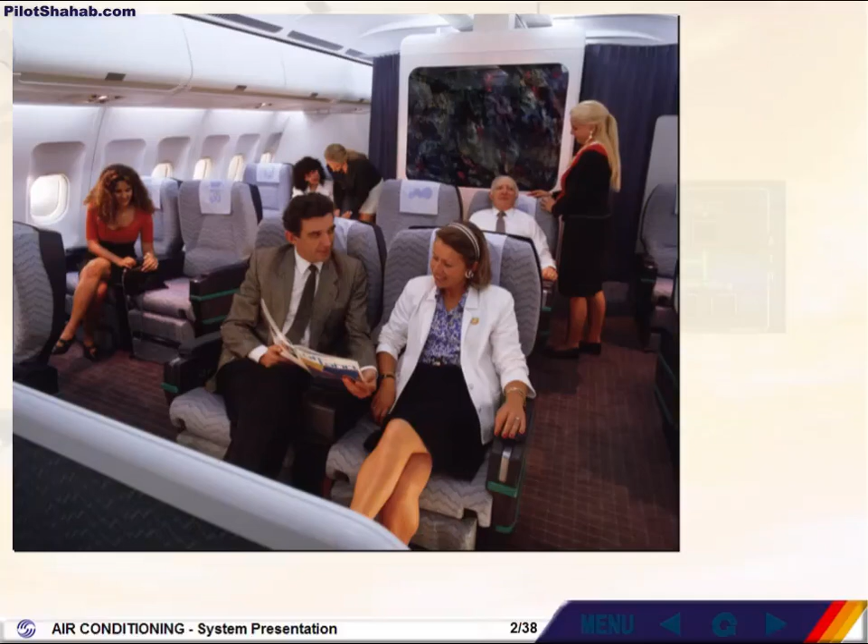Like the majority of the systems on the A340, the air conditioning system is fully automatic and is designed to provide a comfortable atmosphere for working and traveling.

We will begin our study of the system by first looking at the air conditioning packs. The A340 is equipped with two air conditioning packs located in the belly fairing, just forward of the landing gear bay.

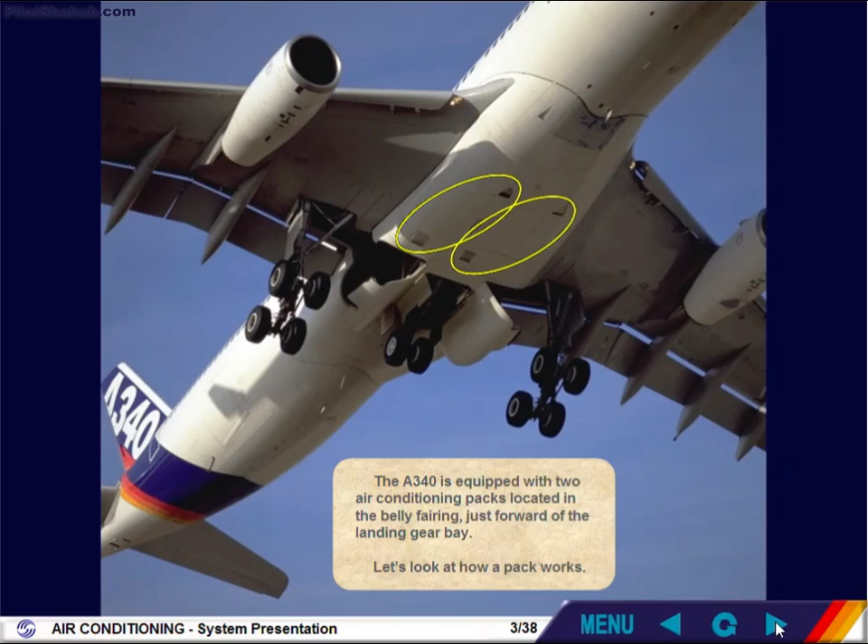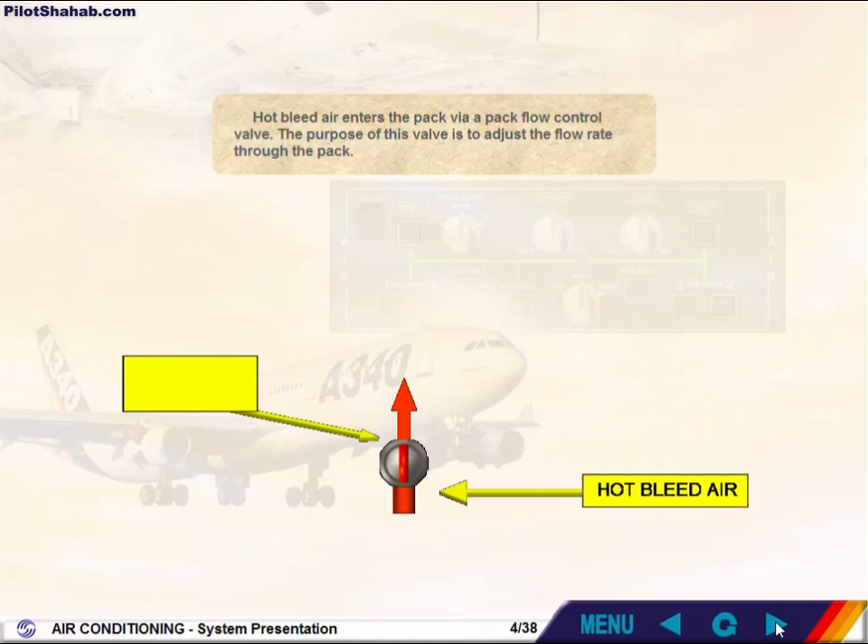Let's look at how a pack works. Hot bleed air enters the pack via a pack flow control valve. The purpose of this valve is to adjust the flow rate through the pack. The air then passes through several stages within the pack, heat exchangers and air cycle machine, so that it is cooled to provide a conditioned air output. In fact, sub-zero temperatures can be achieved.

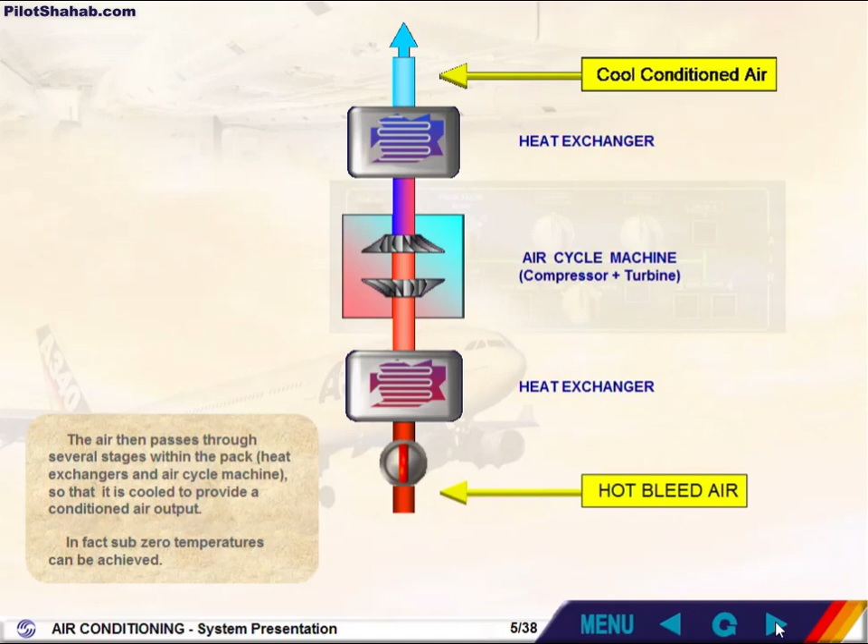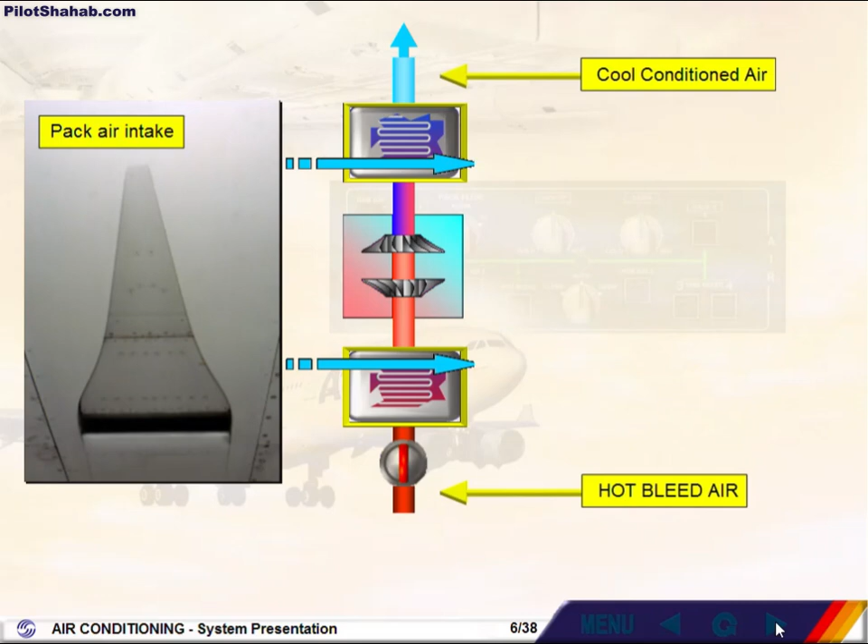The flow of ambient air passes through the heat exchangers to cool the hot bleed air. This flow enters via a pack air inlet flap and exits via a pack air outlet flap.

A temperature control valve is fitted and can modify the pack outlet temperature by adding uncooled air to the turbine outlet flow.

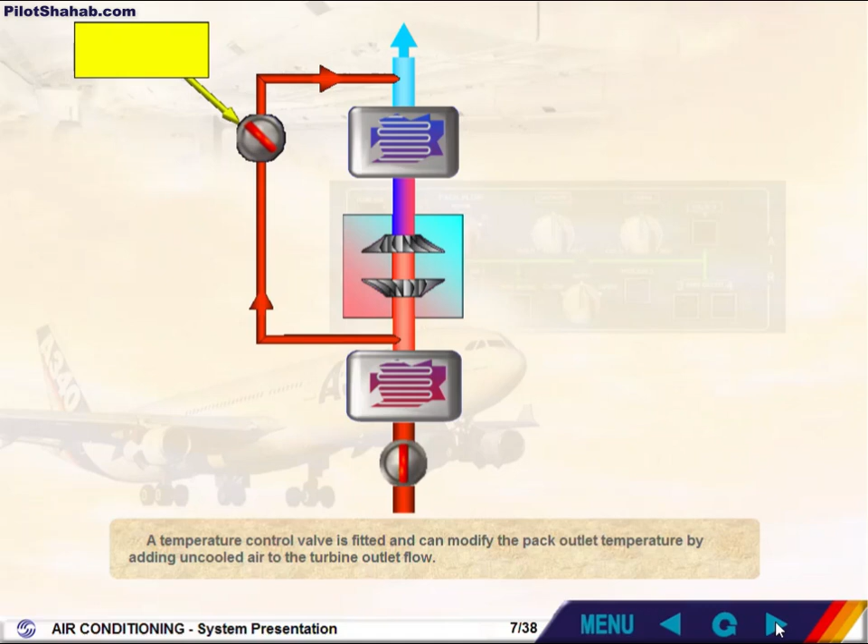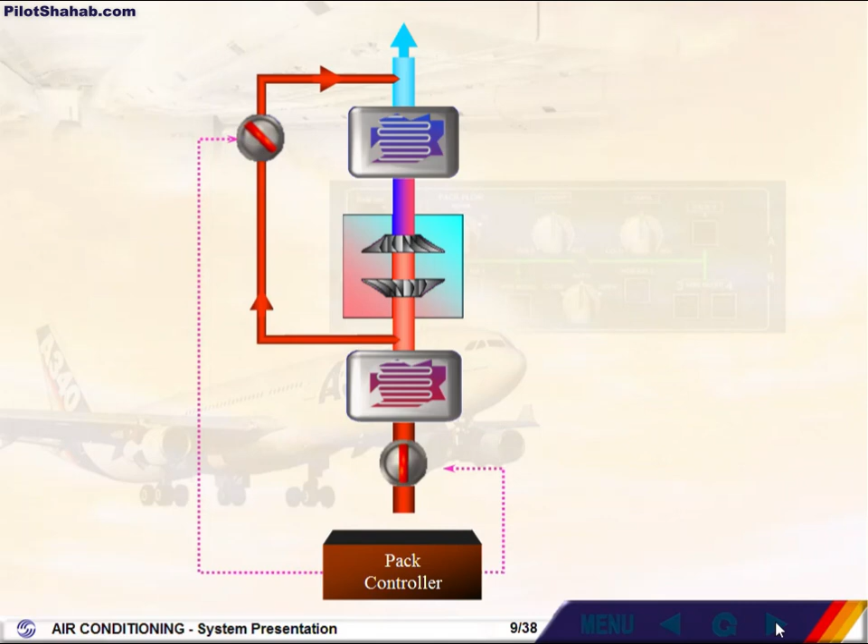The pack flow control valve and the temperature control valve are regulated by a pack controller to vary the flow rate and the temperature output. The pack controller also controls the pack air intake and outlet to vary the amount of air passing through the heat exchangers. Note: to avoid ingestion of foreign objects, the inlet and outlet flaps close temporarily during takeoff and landing.

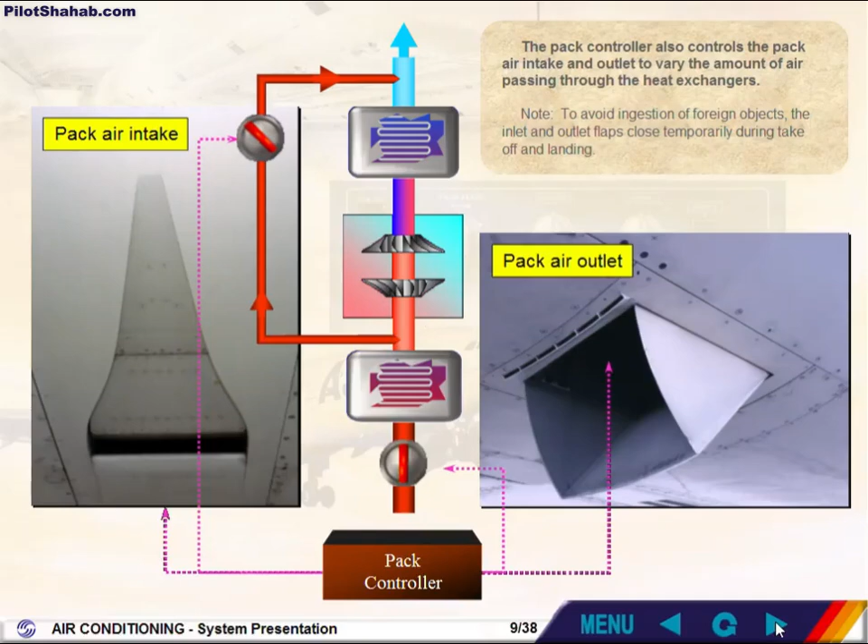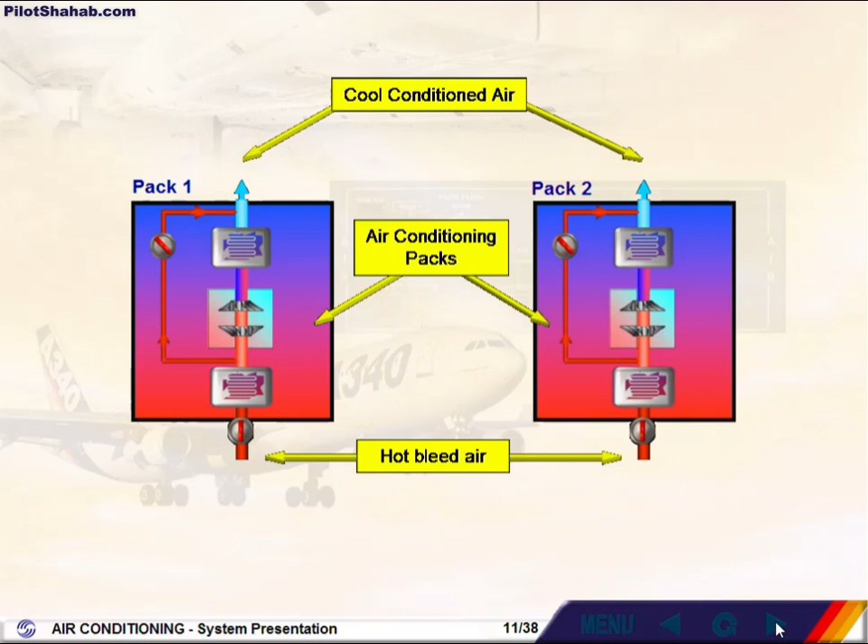To make things simpler, let's define the area within the black box as a pack. The two air conditioning packs operate automatically and independently to provide cool, conditioned air.

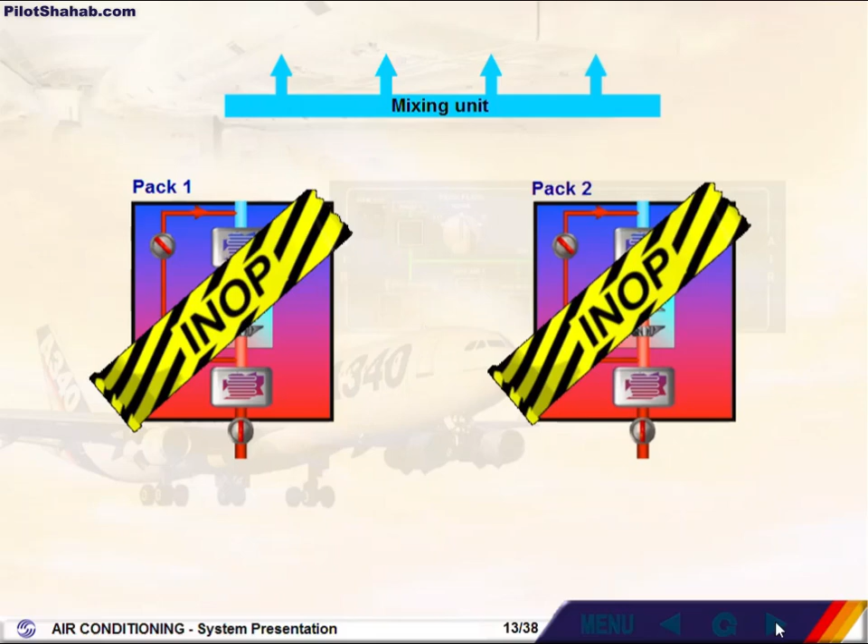The conditioned air from the packs is then fed to a mixing unit. In case of failure of both packs, an emergency air supply is provided via a ram air valve to ventilate the cockpit and the cabin or to remove smoke.

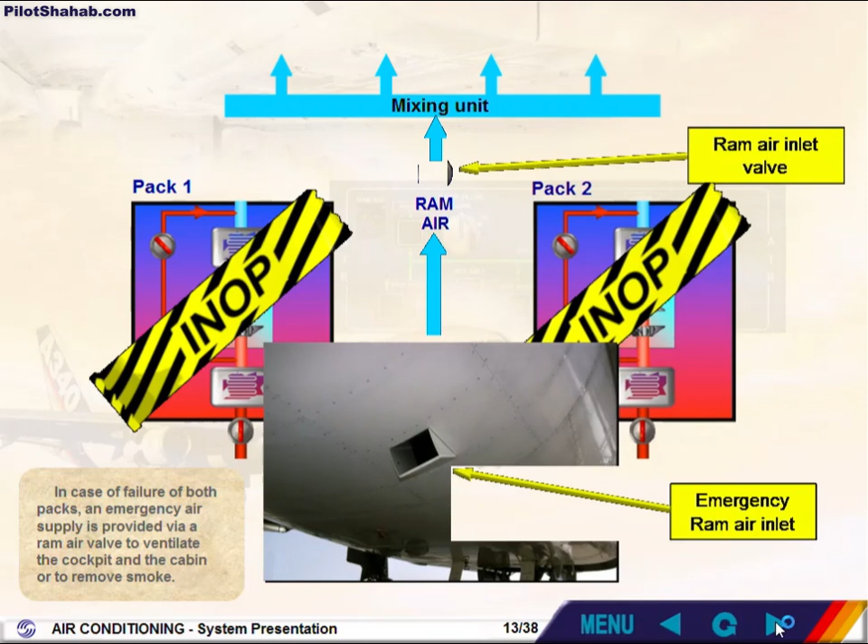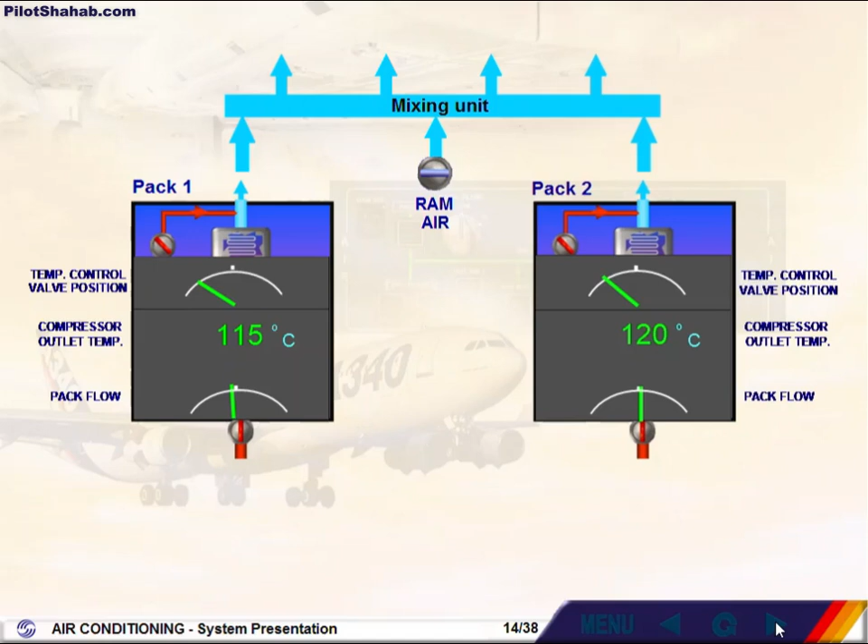Various pack parameters are monitored by ECAM. They are pack flow, compressor outlet temperature, temperature control valve position, and pack outlet temperature. These parameters with the valve positions are displayed on the upper part of the ECAM bleed page.

Having discussed the air conditioning packs, we will now look at how temperature and flow regulation is achieved throughout the aircraft.

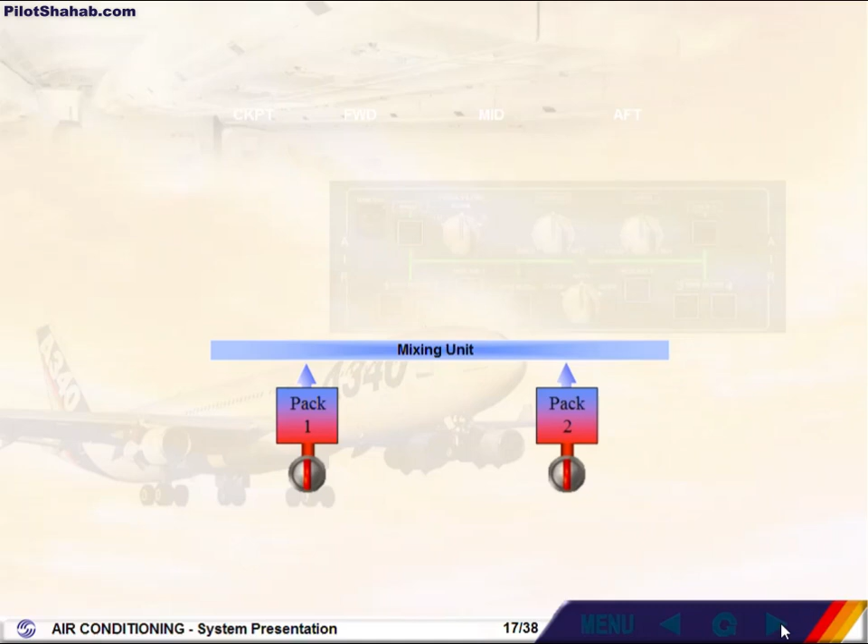The four outputs from the mixing unit feed four separate aircraft zones: the cockpit, the forward cabin, the mid-cabin, and the aft cabin. Let's look at how the temperature of the zones is managed.

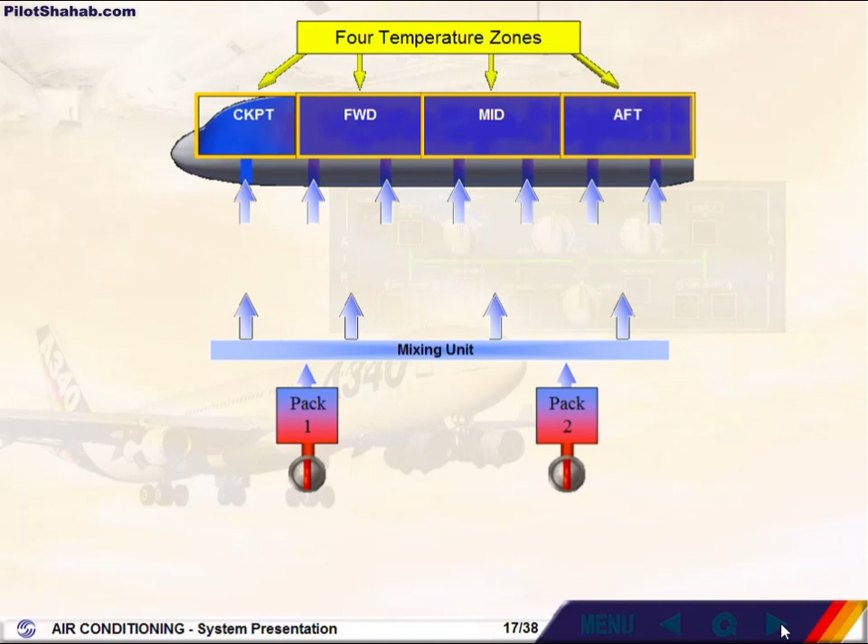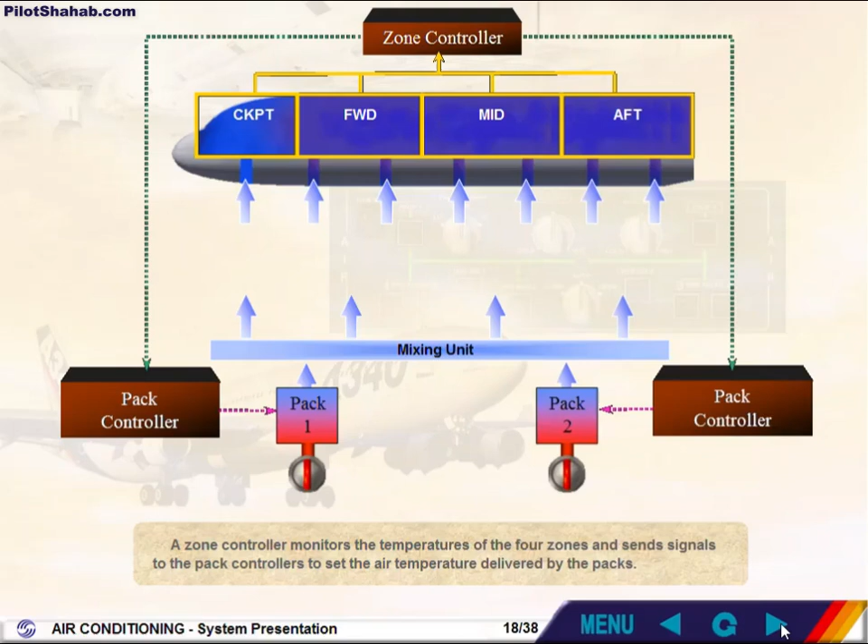A zone controller monitors the temperature of the four zones and sends signals to the pack controllers to set the air temperature delivered by the packs. Normally, cold air is delivered by the packs and is then sent to the four zones.

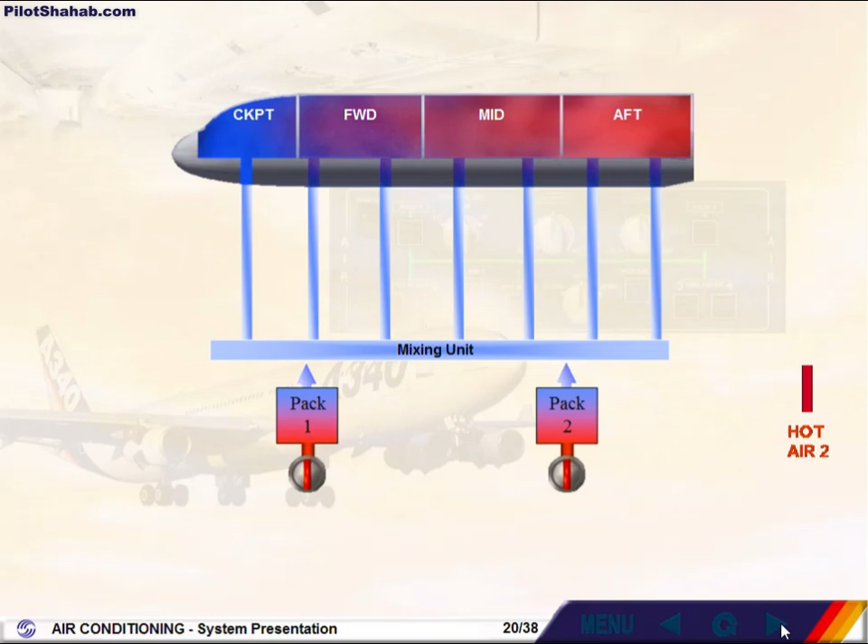Since the different areas of the aircraft may require different amounts of cooling or heating, hot bleed air can be added via trim air valves to achieve the demanded temperature for a zone. These valves are controlled by the zone controller.

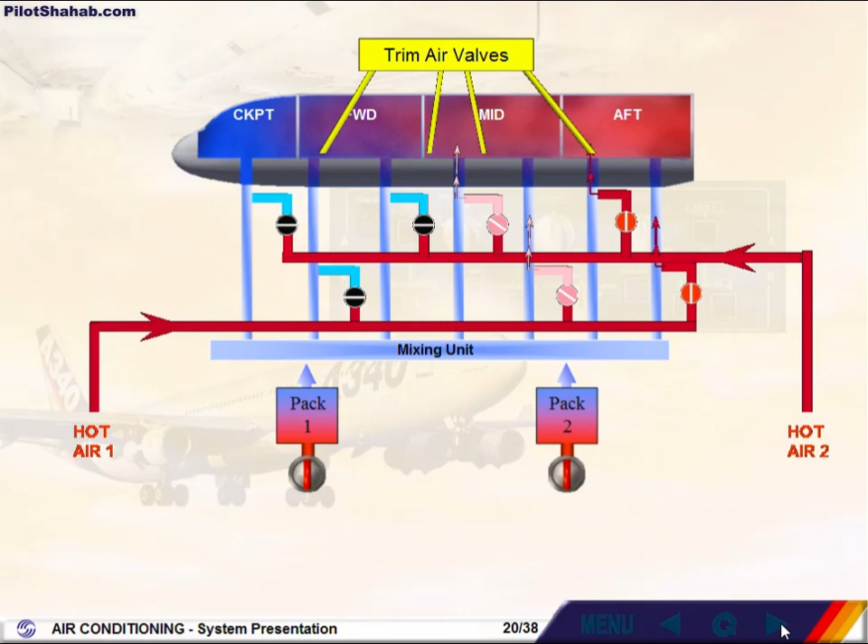In the example shown, no hot air is being added to the cockpit and the forward cabin zone. Some hot air is being added to the mid-cabin zone, and a lot of hot air is being added to the aft cabin zone.

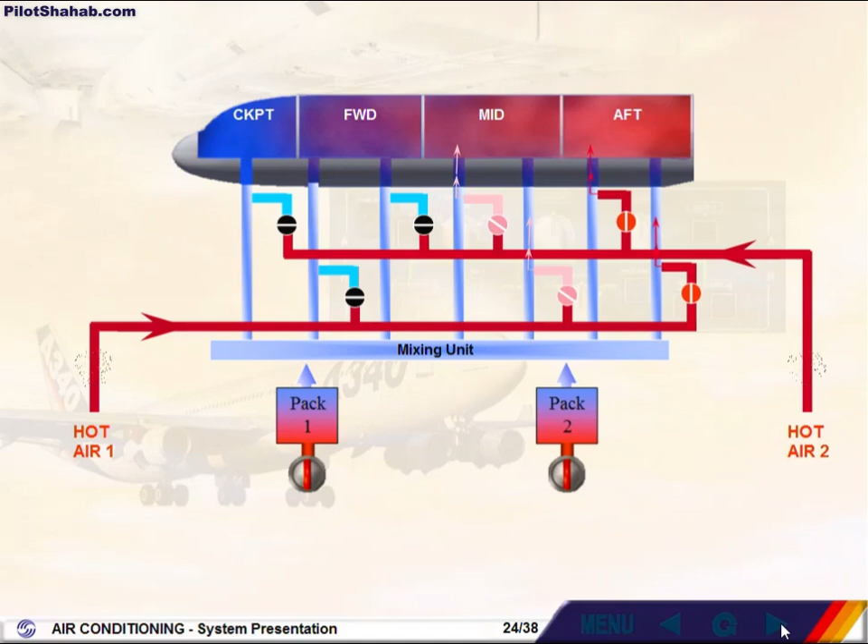The trim air valves are supplied via two hot air valves. These valves regulate the pressure of the hot air supplied to the trim air system for optimized temperature regulation. A hot air cross valve is also fitted. It automatically opens when a hot air supply fails.

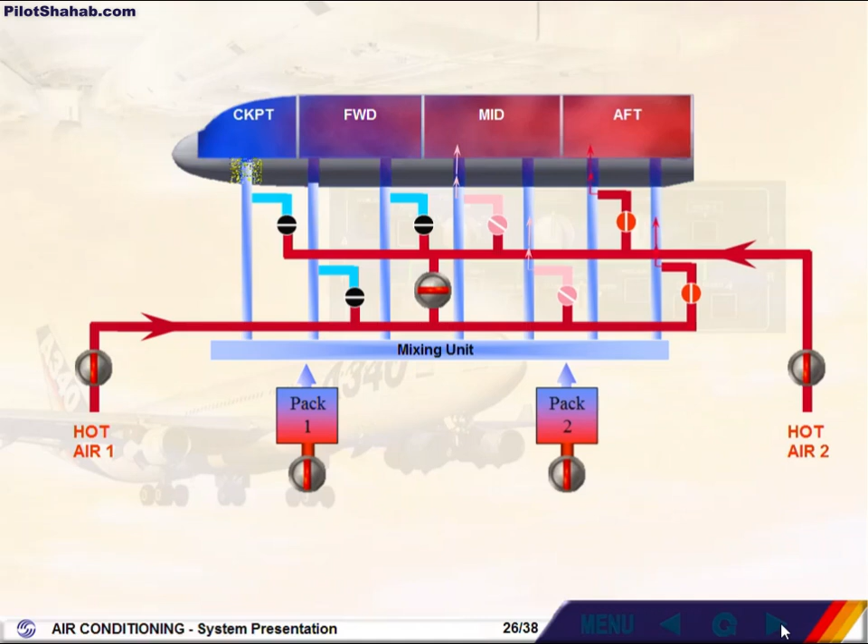Zone duct temperature, which is the temperature of the air entering a zone, the zone temperature itself, and all of the system valves are monitored by the zone controller.

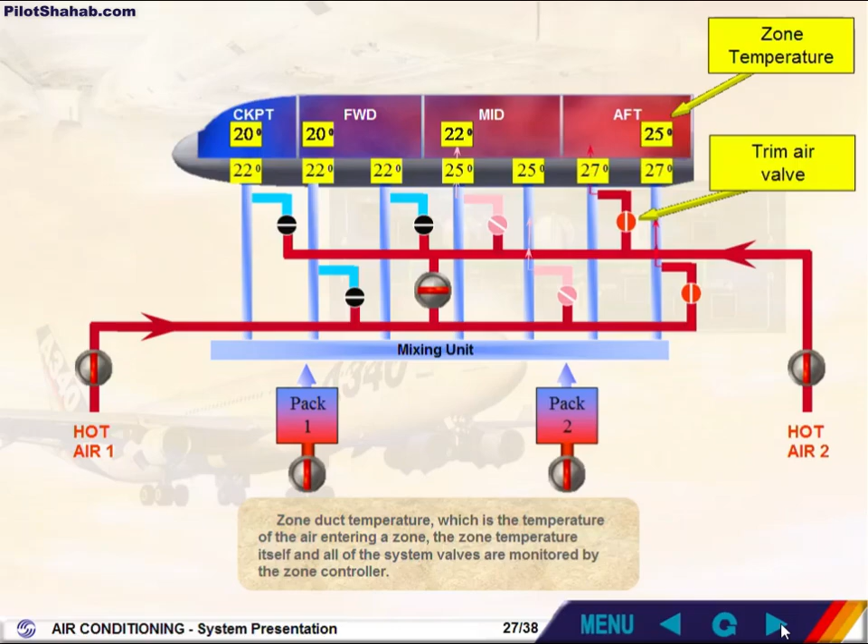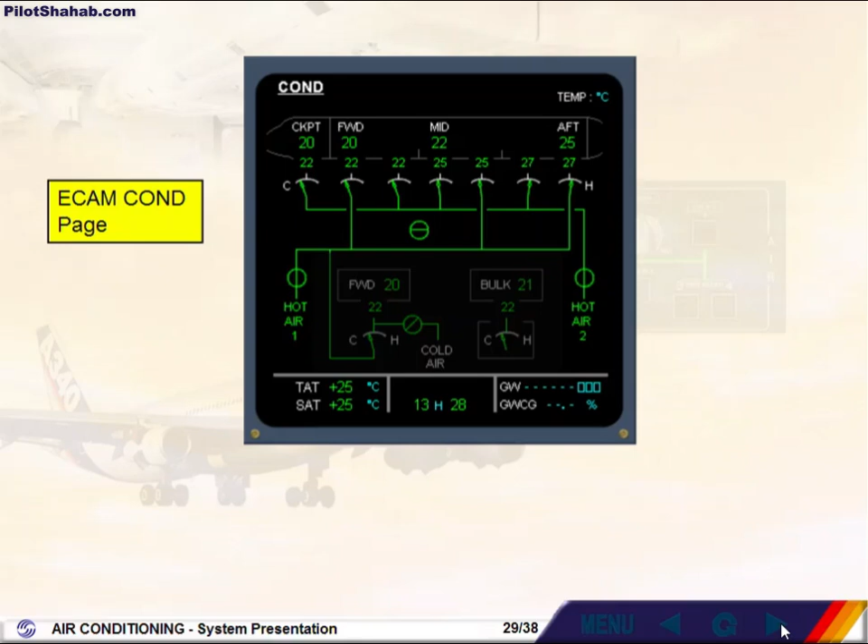The trim air system, the hot air system, the zone duct temperature, and the zone temperature indications are all displayed on the ECAM conditioning page. The ECAM cruise page also displays the zone temperature indications.

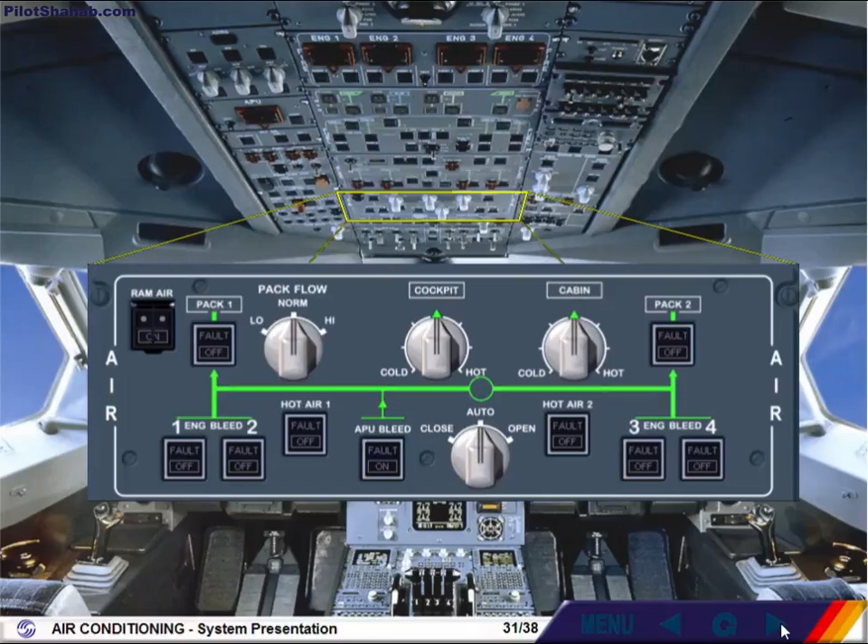The air panel on the overhead panel allows the pilot to control the air conditioning system. Let's look at the controls on this panel in a little more detail.

The pack push-button switches control their associated pack flow control valves. The pack flow selector serves to select the desired pack flow. We will look at the use of this selector in more detail during the normal operation module.

The guarded ram air push-button switch controls the emergency ram air inlet valve. In the example shown, this valve is closed. The use of the ram air push-button switch is restricted to abnormal conditions and will be discussed later.

Each hot air push-button switch controls its respective hot air valve. In the example shown, the valves are open.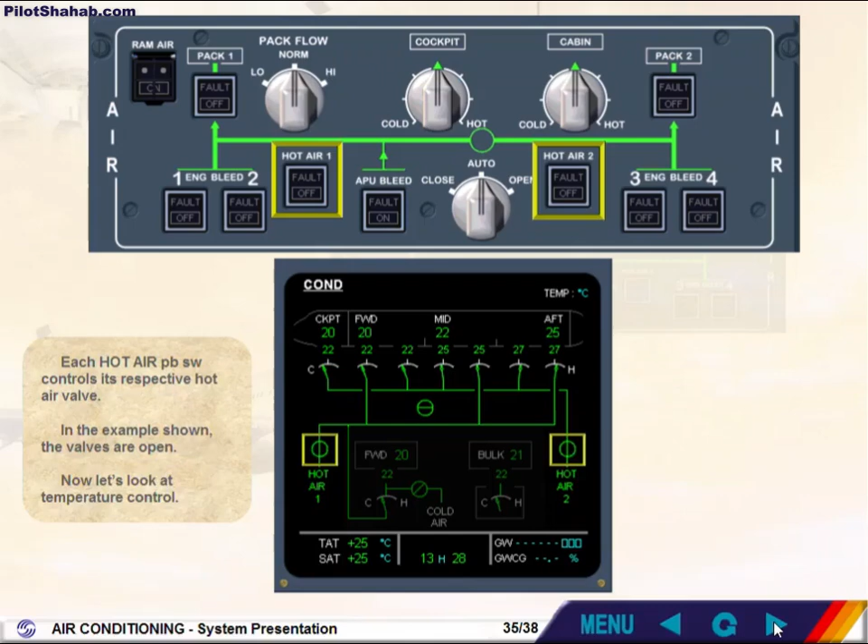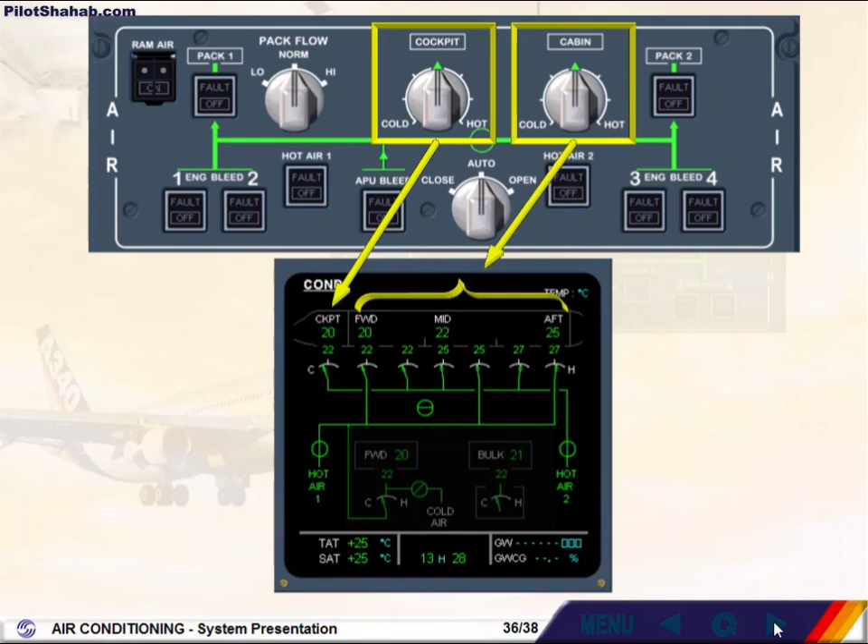Now let's look at temperature control. The zone temperature selectors are used to adjust the required temperature for the associated zone, cockpit and cabin. Note, each cabin zone temperature can be modified through the forward attendant panel.

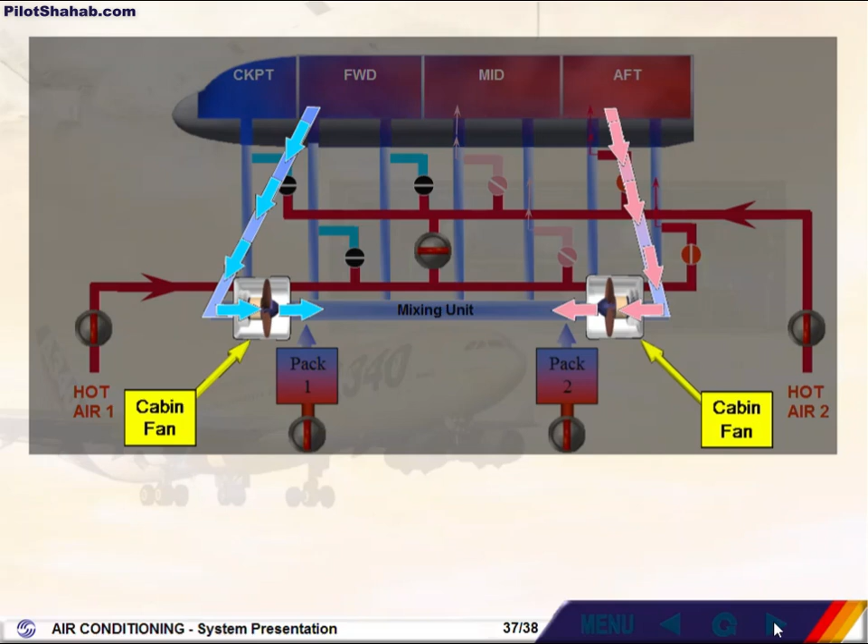Two cabin fans are fitted to reduce the bleed air requirement and therefore save fuel. These fans establish a recirculation flow of air from the cabin zones to the mixing unit. Note, in normal operation, there are no ECAM indications associated with the cabin fans.

A cabin fan's push-button switch on the ventilation panel of the overhead panel controls the cabin fans. This push-button switch can be used to switch the fans off in response to an ECAM procedure.